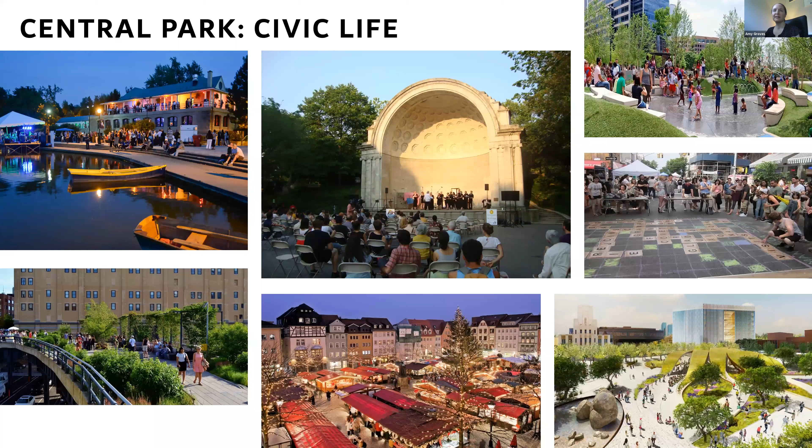The ideas for this site for the future include how to connect to nature, how to create civic spaces that can be the center of town, places for gathering, relaxation and recreation, and of course more formal recreation facilities. Lots of different sports are envisioned for this area, everything from golf, track, pickleball, cricket, baseball, softball. So lots of activities to fit on the site.

And so what we started from this week, you saw these images. These were the town's initial plans, starting with Westwood. In this image, north is to the right-hand side. You'll see Sheridan Drive on your left and Maple Road on your right.

So the ideas included creating a great Central Park space with lots of passive recreation areas, trails throughout the site, and the idea for Ellicott Creek being expanded to create a large lake feature, and ideas for enhancing arts and culture on the site, including perhaps a new theater building next to the existing clubhouse that could be repurposed for arts purposes.

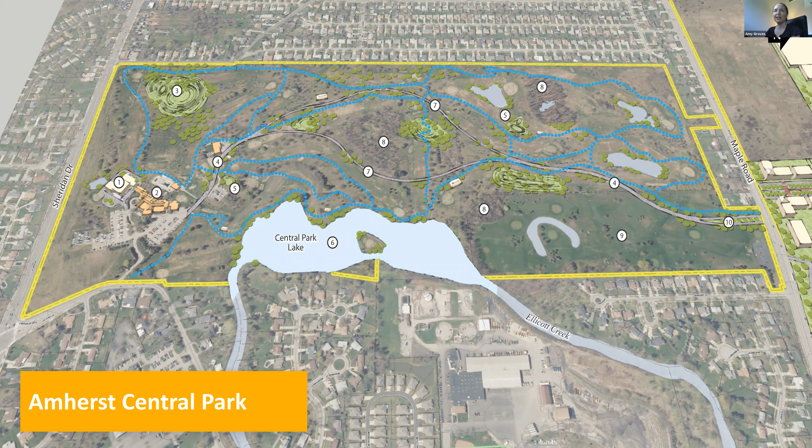So again, these drawings came from a lot of time and collaboration between many of you all on the call, and reflect a lot of that input.

And so then this was the initial vision for the Audubon site. Again, lots of input and ideas reflected, everything from the 9-hole golf course, and in the center of the screen, you see lots of different recreation areas: baseball, softball, cricket, soccer, pickleball.

And then the left-hand side was where it was proposed to have new development that could complement the park site: senior living, mixed uses, the new field house, and potentially also new development around the North Town Center and the UBMD medical facility. So lots of different uses coming together on the site to create a central park and new hub for the town.

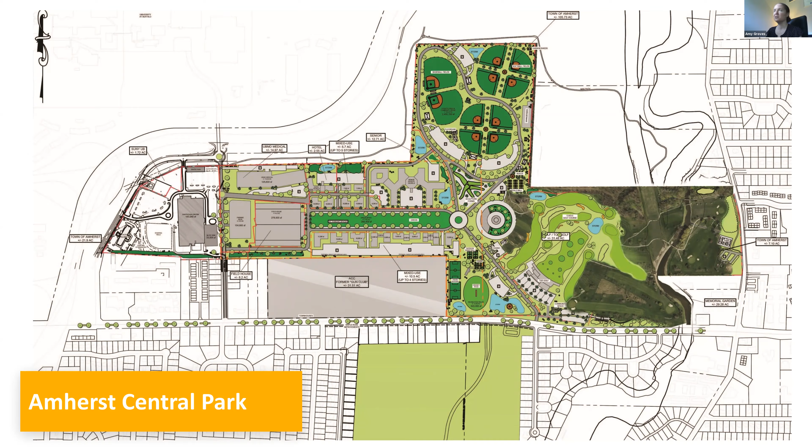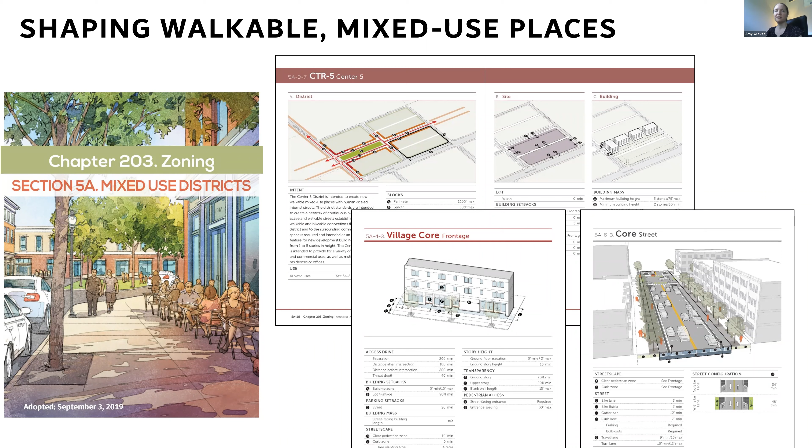Dover Kohl has been working with the town since earlier this year, helping to explore the potential under the new mixed-use zoning code that's been adopted. This code is adopted and could be used in areas that want to redevelop in a walkable, mixed-use way. It has all the rules included, all the ingredients for what makes a great place, like how to design a walkable street and how to design buildings that relate to the sidewalk.

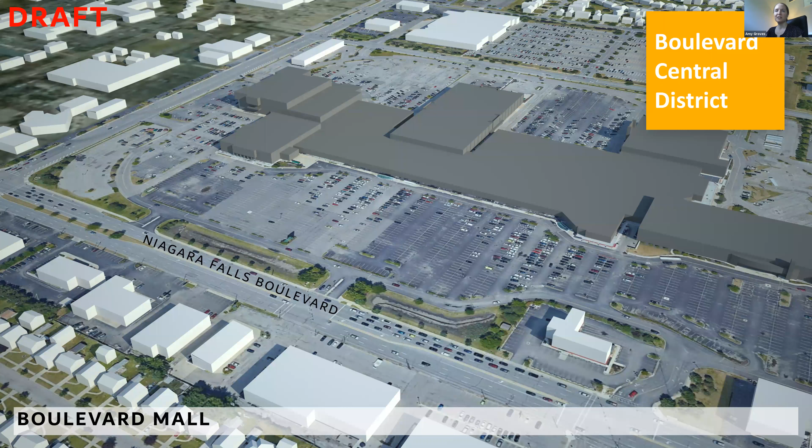So these rules are already in your code, and we have been helping by looking at the Boulevard Central District and seeing how those rules could apply to properties there.

This is an image of Boulevard Mall, what's existing today. We explored how over time new pieces, new streets could be added, and areas around the surrounding parking lots could be filled in with new buildings. Slowly over time, new public spaces are added, and the character of the area could change, following those rules for walkable mixed-use development.

The Boulevard Central District — here you see Niagara Falls Boulevard on the left of your screen, and the Central Park site on the right. Over time in the Boulevard Central District, some of those properties may decide to redevelop and have walkable, street-oriented areas like we just saw on Boulevard Mall. Perhaps some of the other sites as well might choose to redevelop, all working together with the enhanced transit coming through the area and creating these new centers.

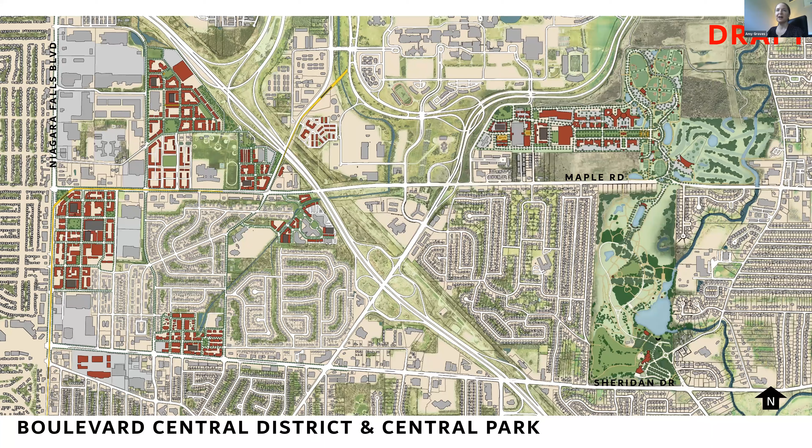What we're going to talk about today is how the Central Park site can fit into this big picture and have another additional center to serve the town of Amherst.

This week we met with many of you. Here's a list of some of the groups we had, with different interests: recreation, arts and culture, golf, waterfront, and the different developers who are interested in the area, talking about the plans done so far and how we could enhance them.

So here are some of the ideas. We have pages and pages of notes, and we've been going through them and using them to update our drawings. But just to give you all a sense of some of the comments we've been hearing.

On the park, we've heard a lot about four-season facilities — not wanting a park designed only for the summer, but able to have things used in the winter as well, like an ice rink that could also be a track in the summer, or a sledding hill that could be used for training. We've been getting more emails throughout the day with additional things, so that list will grow.

The ball fields — we heard lots of comments wanting to make sure they're set up for tournament play and the needs of the youth in the town, so they work best. Also wanting adequate facilities: restrooms, concessions, enough parking, and appropriate access to that part of the site.

So we've got some ideas. We're going to show you how we've been refining the plan.

For cricket, we heard the area initially reserved could get a little bigger to include some warm-up space to serve those players. For pickleball, wanting at least 16 to 18 courts — the last plan had 12, so we've been growing that area.

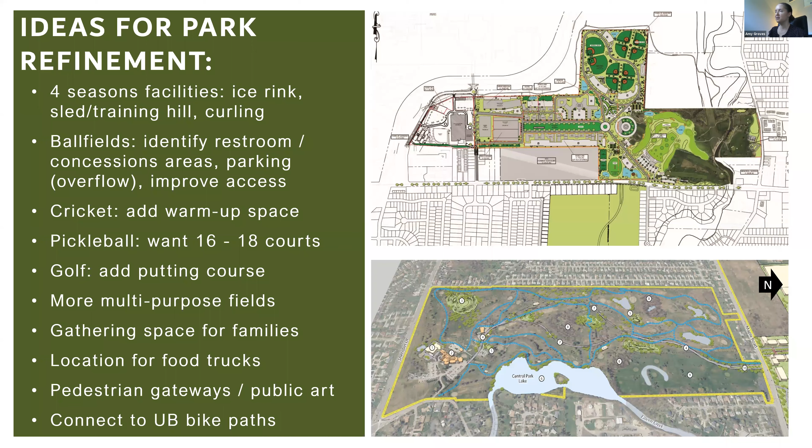So again, just a flavoring — I know there's lots and lots of things, but so that you can hear. There are some questions we're working on resolving, for example, how much parking is needed on the site.

And should there be one garage structure or a couple of garage structures? So we've got some ideas to share with you on that. Access, how do you circulate through the site? How many times or where can we connect to the surroundings? For example, to Maple Road or Millersport Highway, are there other opportunities for connections so that all the cars don't have to come in and out the same way?

How do we upgrade the experience on Maple Road and safety? So we heard that it's an issue crossing between the parks perhaps, can we make that better and safer for folks to use the trail system?

The field house, not sure yet how large of a footprint's needed. So we've got a footprint shown on the plan and idea for where it could expand over time. The ball fields, we've been asked about if they will have lighting. The answer, yes, they will have lighting, and we're working on the details of exactly which ones will be lit, but that is in the plan.

Golf, knowing where will there be the municipal 18-hole golf course in the future. And then remediation on the Westwood site, questions about what is needed there.

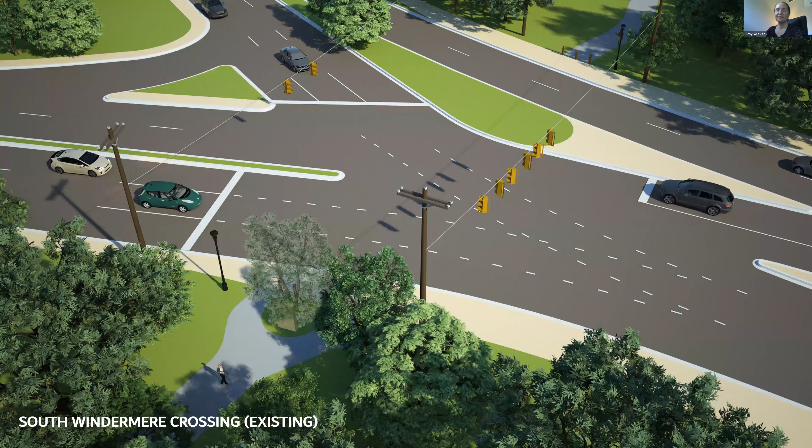So with that, I'm going to turn it over to Victor to talk through some additional inspirational images we've been looking through. Maybe if you just back it up one so I can, from my introduction here, there's a couple things I think have become clear to me over the last week as we worked on this.

First, just how vast the territory we're planning together here is. As you look at those long lists of ingredients that people would like to include in this really banquet of public space and development and economic prosperity, is there room for all of that? And I think we can now say with pretty high confidence, yes, there is. And without compromising the ability to have significant areas for open space, for long views, for environmental restoration. It's really an opportunity for both, and as we look at these long lists, not either or. There's a lot of room, and I'll try to make that point momentarily.

The second one is that the diagram is really strong. What Molly and Jeff and others, the supervisor and your whole team put together before we came on the scene is really good. And if you hang out with architects and landscape architects, they throw around foreign words. One of them is PARTI, P-A-R-T-I. PARTI means the essential diagram, basically, the decided approach that you're bringing to the thing in a design. An architect does a PARTI for a building, a landscape architect does a PARTI for a garden. And in city planning and civic art, we also have that need for a fundamental organizing principle.

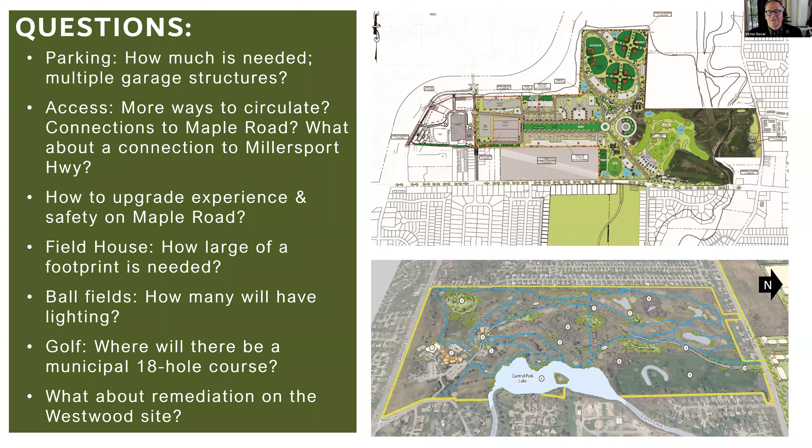We were asked many times about how do we make the whole thing feel like an environment infused with art. So I hope that what we show you in the next few minutes will reassure you about all three of those. Can you go to the next one?

There were all these things that were already listed, and then we were asked to see about where there were potentials for adding more. And one of the things we heard about a lot from folks involved in cultural activity and just people who care about the community was this idea that it's a place for art in all its respects, that the whole environment feels like a work of art, and there are locations for experiencing public art and the arts, including performance, theater, and music.

And I just wanted to show this a little example from a park project in Charleston, South Carolina, which I think is an informative precedent. Go to the after shot here. This is just a crosswalk. It's the crosswalk for the East Coast Greenway, a bike path, a multi-user path, and this is in Charleston, South Carolina.

But they took on the functional need to make the crossing more evident and safer, the high visibility, but also to infuse even that with a little bit of a sense of artfulness with just the symbols on the road. And so if you think of it like that, as we zoom way out and show you big picture things, remember that at some point, someone will, as a designer, zoom way in and do small details. Can you go to the next one?

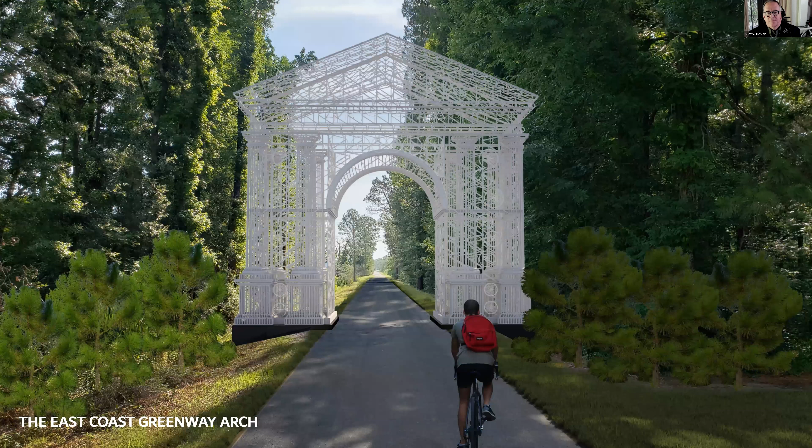Another thing about a big green park like this is that the natural backdrop forms a setting, a context for works of art, including monumental art or public sculpture, or earthwork art. This is an example from that same greenway where there's a place you can ride through an arch along the trail.

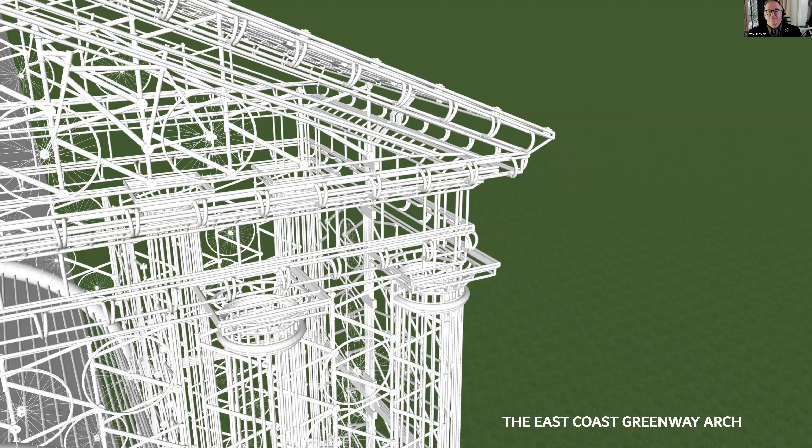It's actually intended to be constructed out of recycled bike parts, which is kind of fun. The point is there could be art everywhere for the people who asked about that, and I think that's possible because the main diagram supports adding new flourishes and activities as you think of them, as the need arises, and as enthusiasm continues—because I hope you're still not finished with this park 50 or 100 years from now, just as people around Prospect Park or Delaware Park consider them works in progress forever.

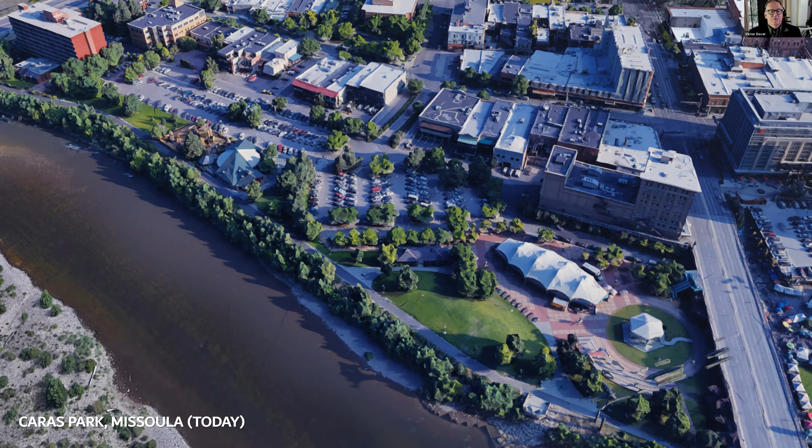This is an example from Missoula, Montana, where we recently redesigned the Riverfront Park. It's called Caras Park—here's the before picture, here's the after. It has a lot to do with peeling back extra asphalt that really is in the wrong place.

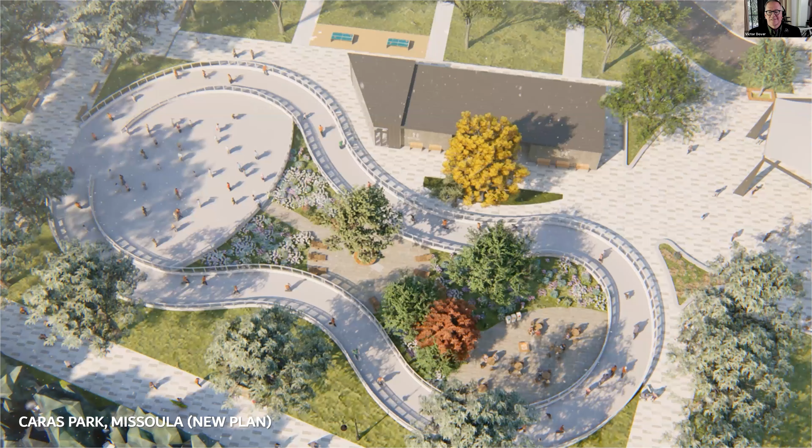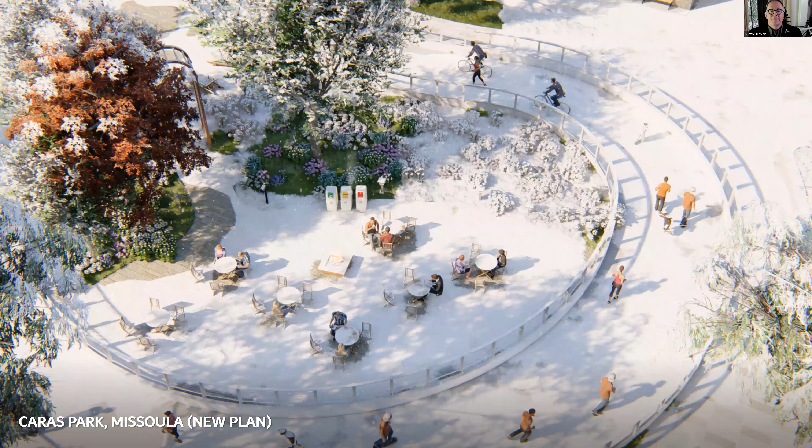There was one feature here that came up that people asked about, so to finish off this idea of precedent: the skating facility. Instead of being a rink like you'd play hockey in or do the ice capades on, it's a ribbon. This will zoom in a little—it's meant to be a way of making, in their cold northerly climate, a Four Seasons park.

From my perch here, I think of everything north of Fort Lauderdale as the frozen north, but I thought you might be reassured by seeing winter pictures of Missoula. Here's their ice ribbon—it's set up so people can watch, and they don't necessarily just go around a big oval, but go through space.

What surprised us was when that suggestion came up in Missoula, it was really, really popular. So here this week, we were asked about a skate trail that could go through the trees. That's an excellent idea, and one definitely worth exploring—we have a placeholder in the diagram for it.

But it might also be possible to add, given you've got all that cooling equipment and the glycol system you use in the North Town Center, a nice ribbon like this one in the area near your new hotel and the North Town Center. So we'll look at that in the plan.

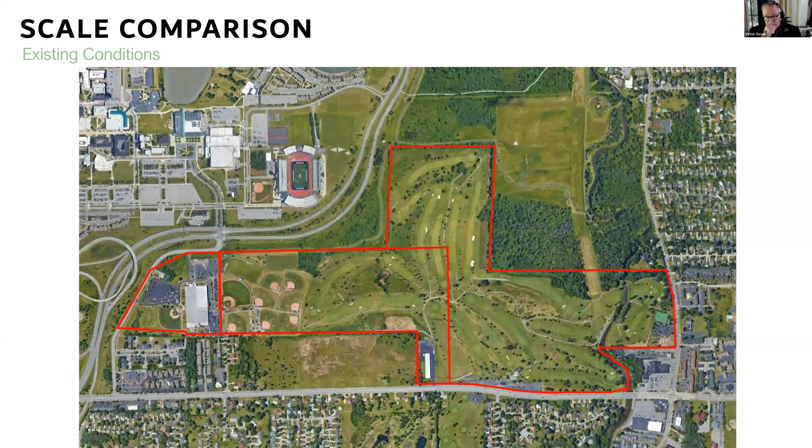Here are the various parcels of the Audubon site, where at the bottom of your screen, running left to right, is Maple, and at the top left is the campus. You can make out the size of the ball fields there. Now, at the same scale, pasted onto the part identified for development, is just a piece of Benjamin Franklin Parkway in Philadelphia.

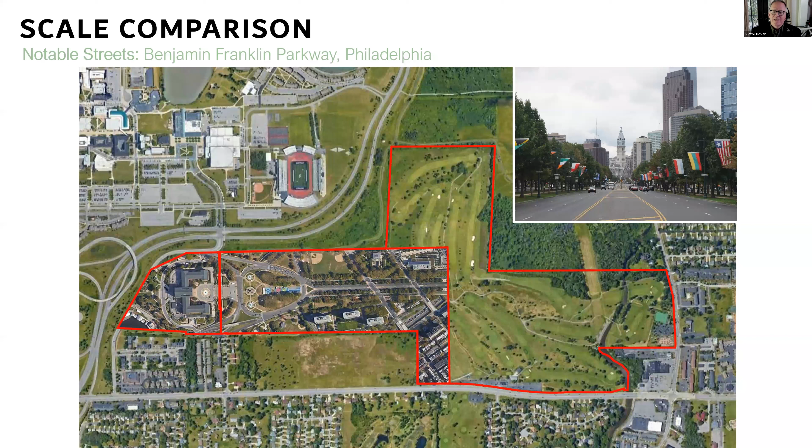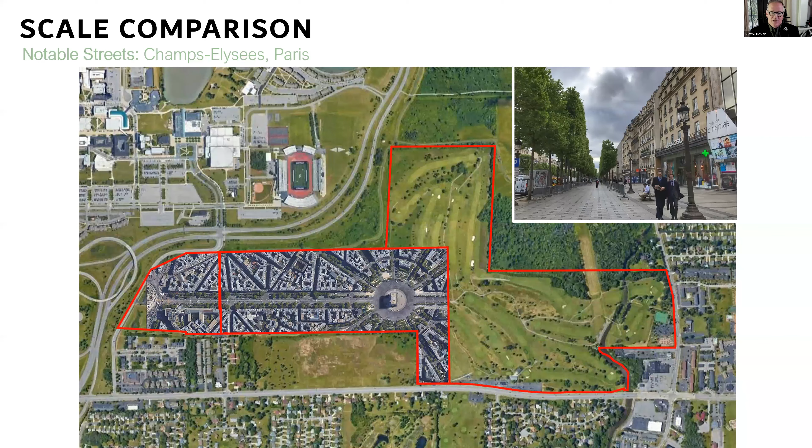You know where Rocky ran up the steps at the end toward the art museum? That's that space. Here's the Champs-Élysées in Paris with the Arc de Triomphe at the end—these are, if you've been there, enormous spaces. We thought this would be fun to look at because of that long east-west axis that appeared in the original diagram.

Here's another long axis, Commonwealth Avenue in Boston, with a green linear park around which the real estate development faces. When they built that park, part of their Olmsted legacy, Commonwealth Avenue set up a great address in Back Bay. It wasn't just making something green or making a wider street, it was setting up an address, so the adjacent real estate had prestige and the benefit of occupants overlooking this space. Moving back and forth from one end to the other, you'd have a unique urban experience. We think that's possible here too.

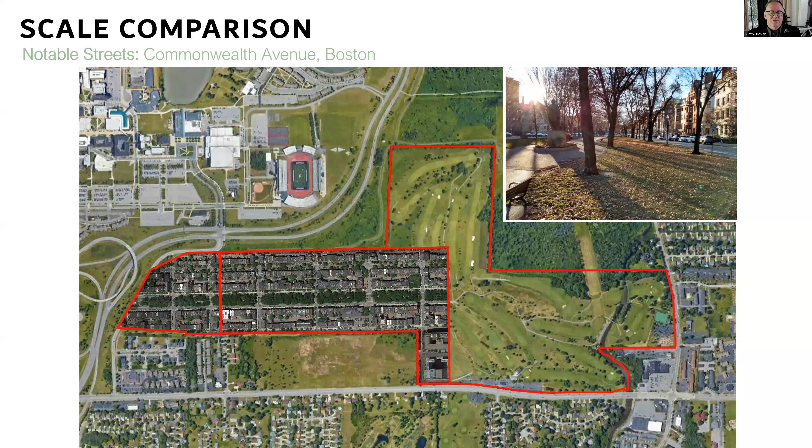Next, this is the Rambla in Barcelona, which is actually vast - if you've been there, it's an enormous space. This is the central one, Les Rambles, which has a very small amount of its width devoted to cars, most of it in the center devoted to pedestrians on a promenade with trees. If you've ever walked from one end to the other, you know how far this is compared to the Audubon site.

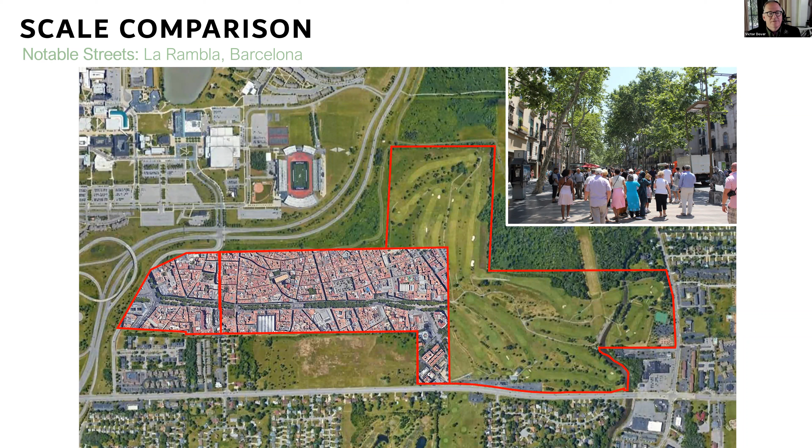Just put a few of these here for fun. Closer to home, here's Main Street in Saratoga Springs, and you know how it has that famous, very slight bend in the street, which tips the storefronts into your field of vision as you move along it.

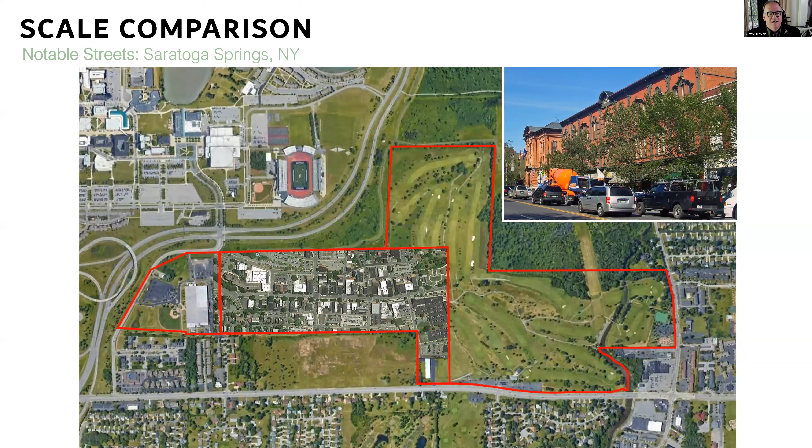There's room here for a lot of town - room to do a number of addresses for a great many new buildings and blocks and streets in a whole neighborhood sort of way.

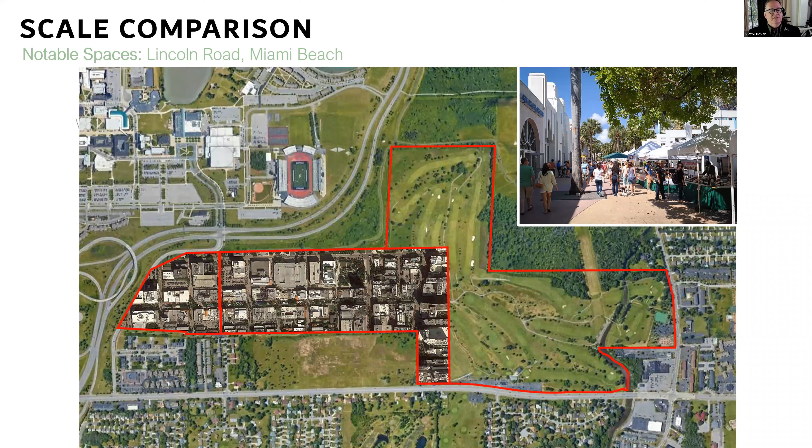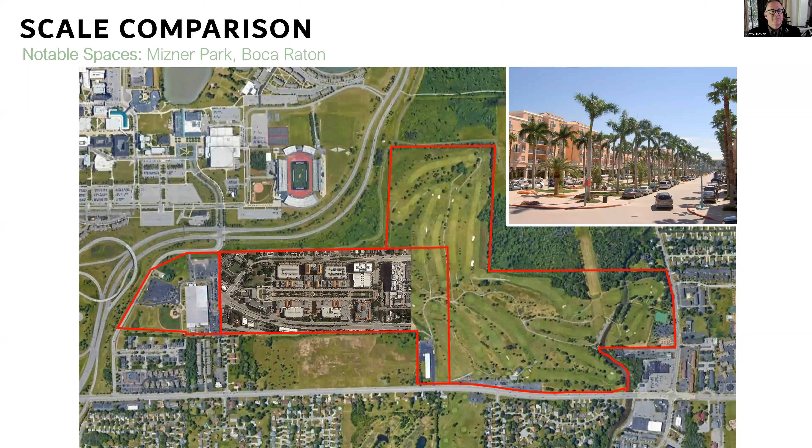This is a pedestrian-only street closer to home for the folks who visit us down in the tropics - that's Lincoln Road. Here's Mizner Park, more recently built, which has this central grand promenade that we heard was an initial inspiration for the green in that diagram for Audubon.

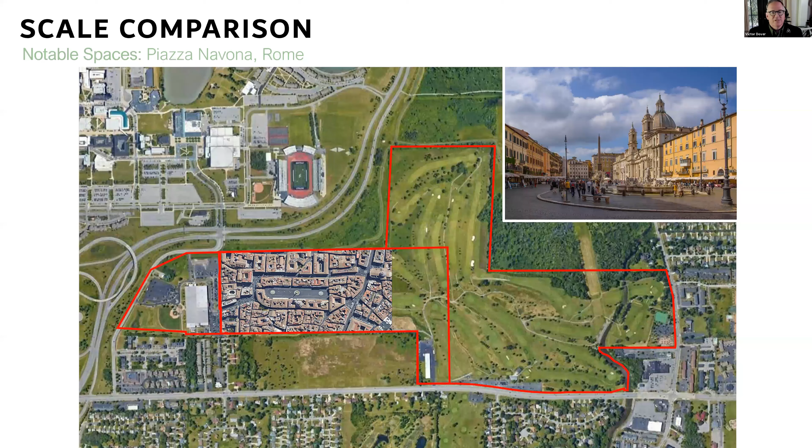And just because we can't help ourselves, one from Rome, the Piazza Navona, perhaps one of the greatest public spaces in the world. And it only stretches about a third of the way between the North Town Center and the parts on the east that are meant to remain in pure park form.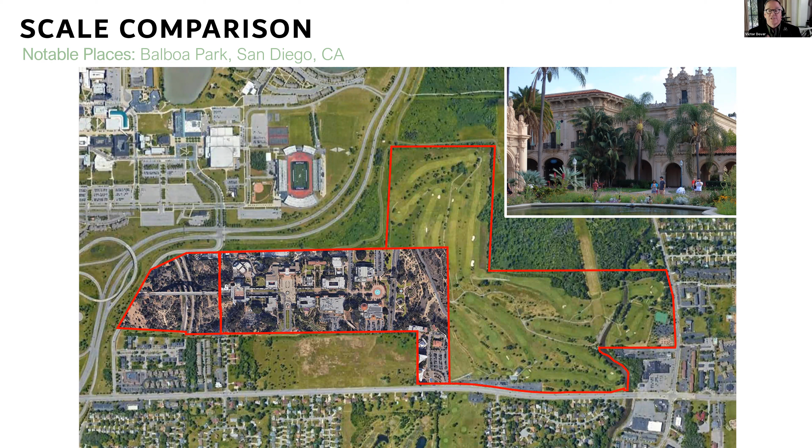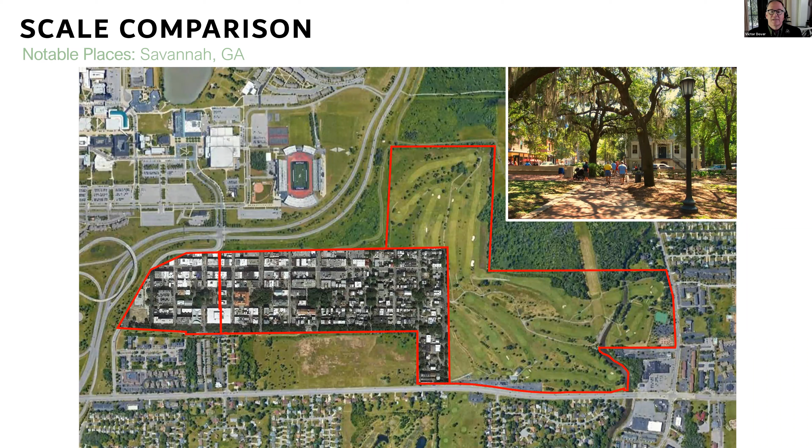So the scale comparison should tell you two things. One, there's a lot of room here - here's Savannah's squares as a final example. And two, you don't have to be afraid to use it. You will, even though you add buildings and the parking needed for those and add streets, have blocks, hopefully of a small enough size to make the environment walkable, and still have room for substantial leafy green spaces. Even in the built up part on Audubon, it can remain tranquil, and all around it, even more so.

Next. Now, everything we're about to show you is a draft. For plausible deniability, let me say we're about to show a number of images that your supervisor has never seen - sorry, Brian, we just produced them in the last 25 minutes. Kim has never seen, Dan has never seen, your other elected officials haven't yet seen. It's just a draft - everybody, please repeat after me, draft. That means everything we're about to show you can change, probably will change, get refined as we go forward. But we thought it was a good point now, after several days of work, to put our pencils down and show you what we have so far.

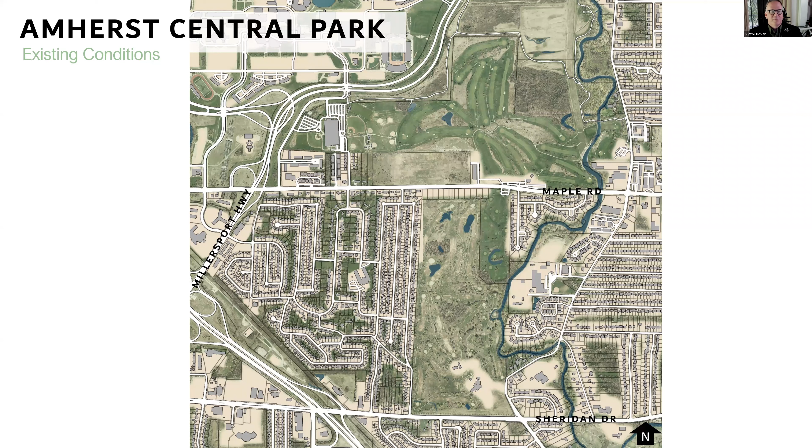Okay, so here's the aerial photograph and little footprints for the existing buildings on the existing conditions. To orient you here, Sheridan's on the bottom of the picture, Maple's running across the middle, north is up, and here's the after condition.

After substantial development closest to campus, retaining that long central green, we made some tweaks to that idea. Then active recreation, including baseball, pickleball, tennis, cricket, and golf in the northern part on Audubon. And then going like a T shape down the center of your image, the Westwood site refashioned as a nature park. I'll also point out that rectangle in the center, the gun club parcel, for which the future is not entirely certain.

We know, but when we look at how it all is built up around it and how incredibly shaping of the potential for that parcel the park is, we've recommended it be included for the purposes of planning, that we've been thinking about and thinking ahead about what eventually the gun club parcel might also be. So you'll see that as well.

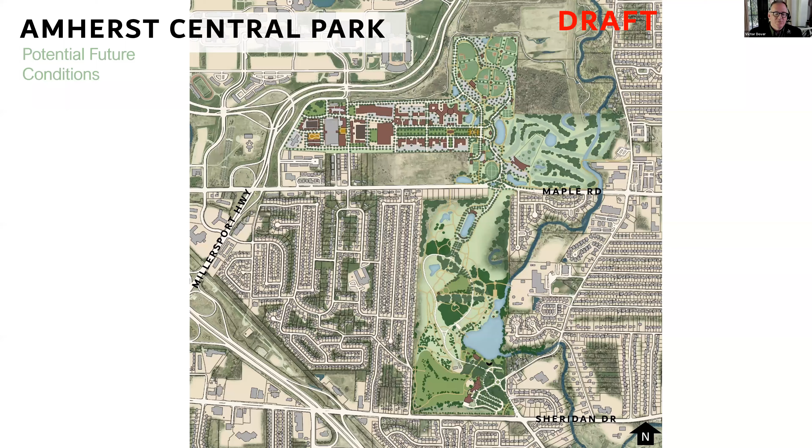Now, we've thought that it might be useful to x-ray this a little bit and simplify it, just like your doctor x-rays you to make it easier to see what's inside. The first of these x-ray diagrams shows the existing and proposed or imagined street network.

In the upper left-hand side, the streets are in a more regular format, like a traditional town or village, with interconnected blocks of streets. On the eastern half, running between both parks as we move into the nature park and recreational areas, the street network relaxes into an organic or picturesque geometry, more in the Olmsted tradition.

So juxtaposing those two kinds of geometries is one of the things we spent some time tweaking over the last several days. Next.

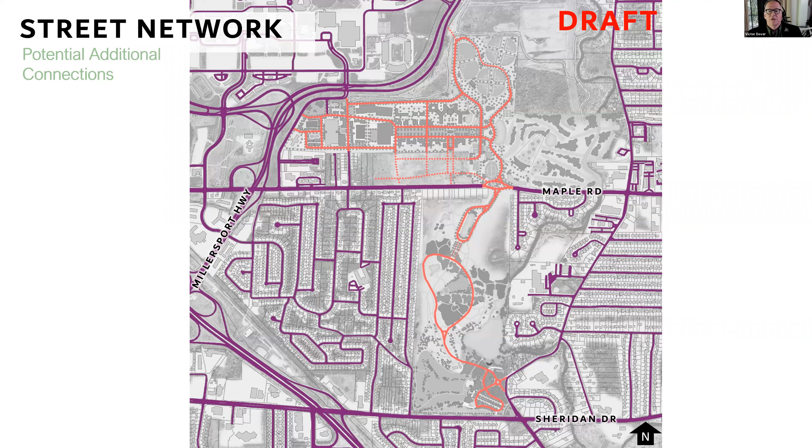This diagram also shows, in a dotted line, some potential additional connections if and when the gun club parcel comes in and is developed, so that everything becomes more whole as growth and change occurs. It makes things better rather than worse.

Okay, Amy, you want to tee this one up?

Sure. So now we're looking at the big picture back over Sheridan Drive, looking towards the north. This is existing conditions, and then we've laid that diagram into the site so you can imagine in perspective how that would look, starting to pop up some of those building forms.

So this is in progress work. We haven't yet modeled the park area, so that's to come. But you can see this starter diagram begins to help visualize the view from the south, looking out over the park towards the university.

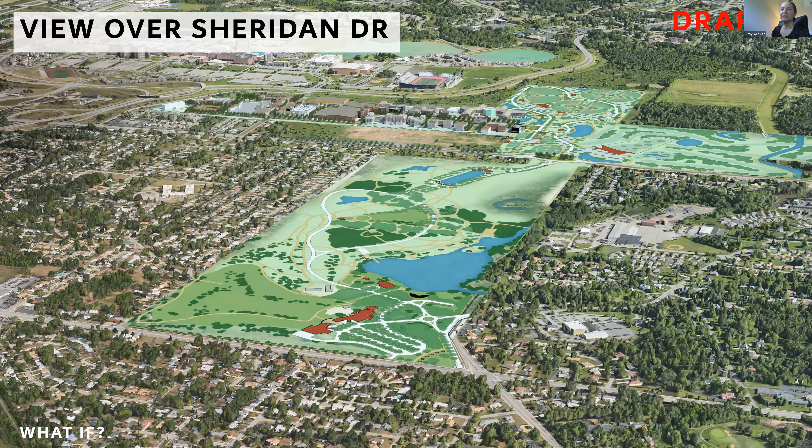And so we're going to start with the southern side and Westwood. Victor, if you want, I can cover these and you can just interrupt me. And Joe, please interrupt me also. When you do the close-up, I'll jump in.

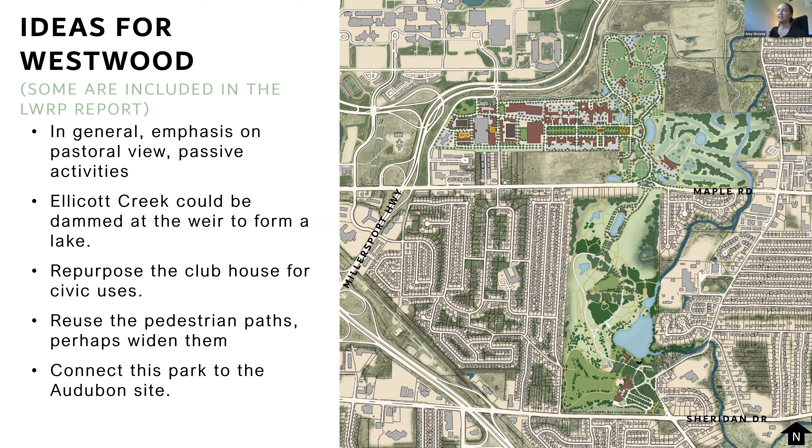Okay, great. So again, some of the ideas we've been looking at come from the work already done in the LWRP report, but in general, emphasizing passive activities on this site. The idea includes damming the creek and creating a lake in this area, repurposing the clubhouse for civic uses, reusing the existing golf paths as multi-use pedestrian paths. Perhaps they could be widened for that purpose, making a really great connection to the Audubon site.

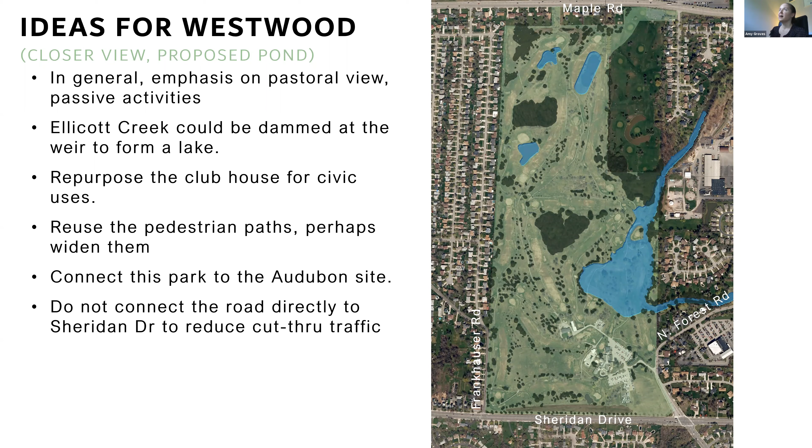So we're going to go here layer by layer. This just shows the pond view, and again, for the connectivity, I'm going to go to the next slide.

The streets can connect through, but perhaps at certain times, certain portions could be closed off, so it doesn't create a flowing connection north to south, but rather you could decide when you open and close those. Also, there was a decision to connect to Forest instead of Sheridan Drive.

And these paths meander through the site. So again, it's not an easy north-south shot, but the idea is that the folks coming through here are using the park and enjoying the facilities.

Joe, is there anything else you want to add about that? There's a whole suite of tools we can use to discourage anybody from even thinking about using this as a convenient daily cut-through. Some of those tools are already on display in the geometry, and there are other things we can do in the design of the streets themselves. So I think this will be inviting to people who are coming to be here, and not very inviting at all to those who might think it's another way to get around.

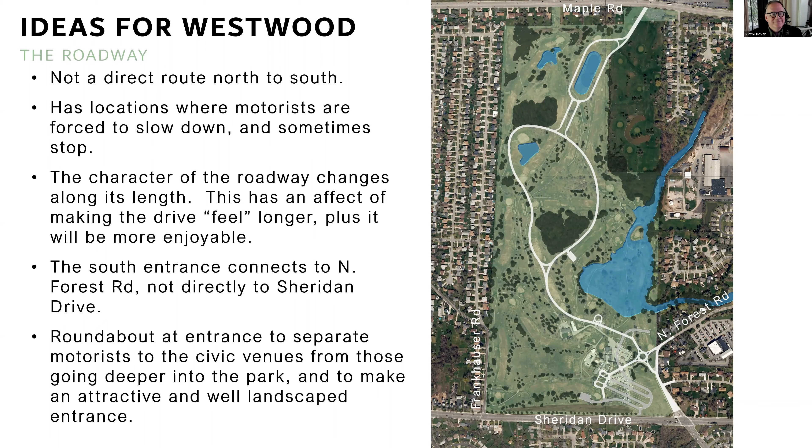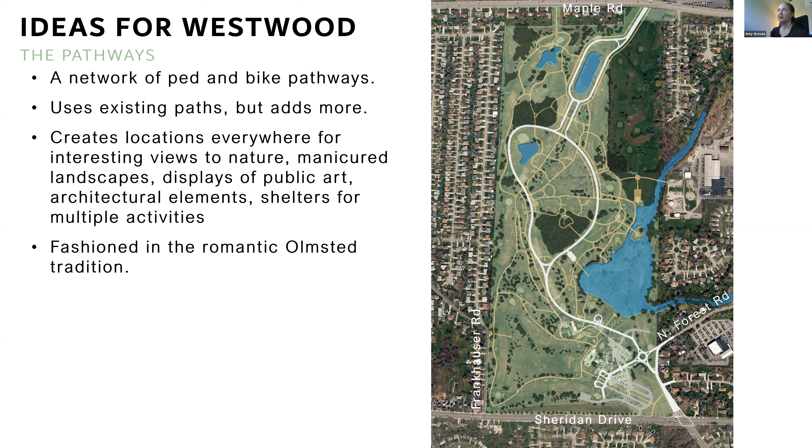And then adding onto that diagram the pathways. Again, this is looking at great parks and the Olmsted tradition found in the region, and looking at how to create interesting experiences throughout the park with a real network of pedestrian ways, opportunities for public art, and interacting with the different shelters you can see on this next diagram.

So there could be, in addition to using the clubhouse, adding a theater facility on the south, and moving through the park many different opportunities. There could be a great building overlooking the lake, more small structures throughout the park, pavilions for events, and you can imagine having a great wedding photograph in many of these places.

And the big idea, lots more. Just one more thing about the pathways: this is shown with just two colors, the brighter white for streets that can have traffic, and the yellowish or sand color for those meant to be pedestrian paths.

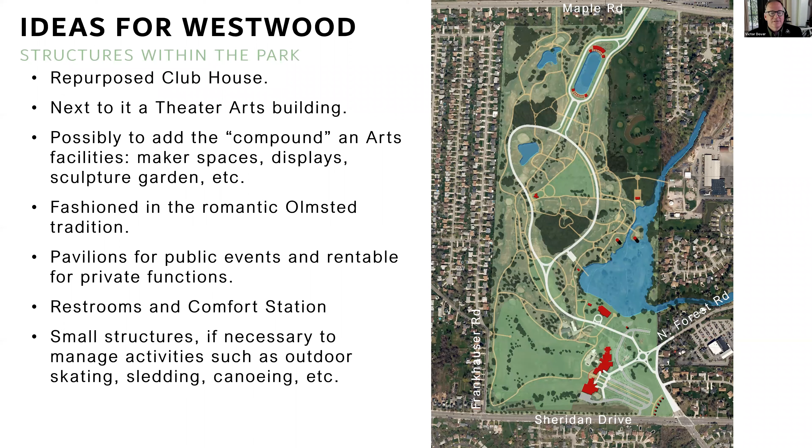But within both of those, there's a whole range of different street types and trail types. Some trails might best be mulch, very natural, just for walks through forest or garden, and others paved for universal access, and still others paved a little wider so they work for biking as well as walking or running. So don't look at this diagram as all one thing—there's a whole range of decisions to be made about each segment or loop in a trail system like this.

Looking at Olmsted's legacy, the designs are very informal and curvy and naturalistic, but every now and then you come upon something a little formal, and in that formality they've set up great places for public art or some type of architectural folly that children probably enjoy more than adults, because it builds on fantasy and imagination. I think there are thousands of little mini projects in here that the community can have fun figuring out and building in the future.

I'm already jealous of whoever gets to actually design this park.

And just this last slide, emphasizing trees, the big idea. So planting more trees in this area, and that canopy, can really help define the character of this area.

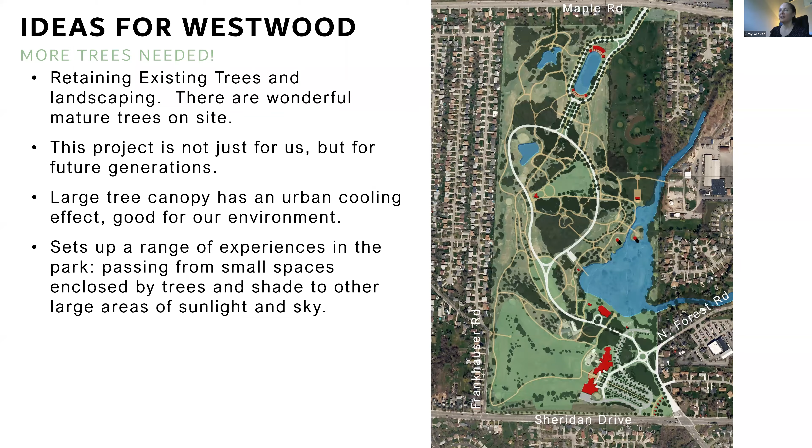On that subject of more trees, we haven't even added in our diagram yet all the trees we know need to be added, or captured every existing one. So be prepared to see a greener, more dark green version next time, where we deliberately keep the long views set up by the old golf course, which make great gestures across the land and terrific places for wedding photographs as a backdrop, but also closing those views a bit or framing them with new forested areas, and doing street tree planting, which we haven't shown much of in this diagram.

There's a pair of buildings in the foreground worth talking about: the existing clubhouse, and an imagined facility for the arts. Those could be together—they could share, as the old clubhouse is repurposed for civic use, and the performing arts facility, should that mature here, share the parking, but also the terraces off the back toward those long views, making amazing places to step out during an intermission, or have a reception. So we're trying to keep that thing that's wonderful already about Westwood on each corner of the plan.

There's one example of that. If you look at the plan, facing that long view next to the existing clubhouse, between the clubhouse and the theater, and look to your right, the pathway leads in front of the swimming pool toward the lake. That's one of those classic situations we try to set up, where you go from a big wide open green space, travel through a narrow forested path made narrow by the height and canopy of the trees, and then it opens back up again with an overlook of the lake. So once again, the sun comes out, it's nice and sunny—it's a connection between green and blue.

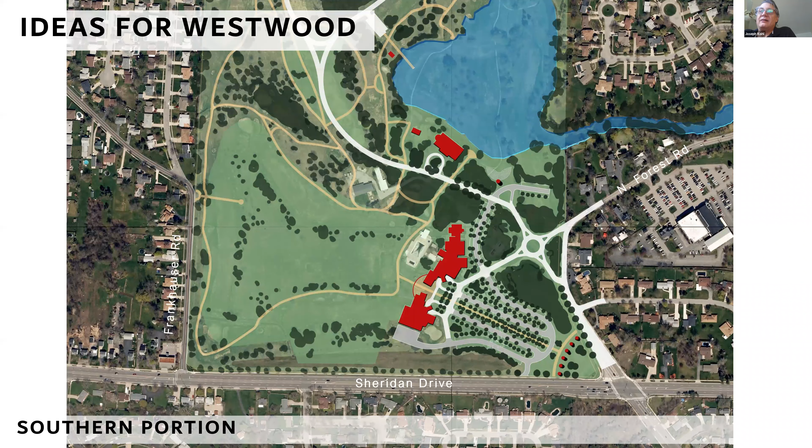Go on to the next one, Amy. So partly this is about getting ball fields lit the right way with the right solar orientation, counting up the parking spaces to make sure that works. And part of it is about composition—Joe's comparison to landscape painting and composition is pretty apt, because there are basically three rules.

One is the one you just described: you go narrow before you go wide, and you maximize those contrasts so that when people go from one experience to the other, it gives you that feeling of, oh, I've arrived somewhere, or this is different.

The second rule is you design not just the background, but the foreground, the middle, and the background. Just as Constable did his paintings, or Humphry Repton did his landscape architecture, and then Olmsted copied that, they deliberately push things into your field of vision on these long views from the side, like the tree island in the lake, or the tree that is halfway between where we are close up and the distant trees. This maximizes your experience of the space, makes it all seem a lot bigger.

And the third rule is line things up. One of the things you line up with is the topography. Look at this picture toward the back—maybe Amy, you can put your cursor over it—you can actually see where the natural end of the Ellicott Creek floodplain area is, and where there's a bluff.

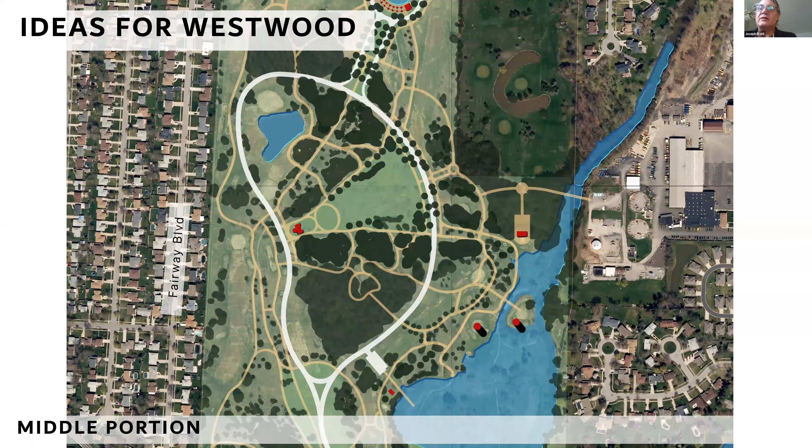The road also runs along the edge of the lake, and I think you'd want to keep some views open to the water or the open space. So maybe the landscaping on that edge is a little thinner, or at least the understory is cleared out a bit. But in the internal part, you could start to build up the landscaping and trees, basically restoring forest habitat. I don't know how well the greater community is doing with preserving forest, but this might be a place where that could be done, so you get the forest experience.

There are a few of those around the plan. We thought maybe a good one there with the lake, so you can experience and enjoy it if you're just driving by, or actually go play with the boats or dangle your ankles in it. It would be used different ways at different times of the year.

Okay, the next one. Just to point out, we've got to move along, so I'm going to push you here. What, you wanted to say something else? We changed the slide on me. There were some things people wanted to point out. Okay, back it up, Amy. I'm sorry. Okay, you got the move along idea, right?

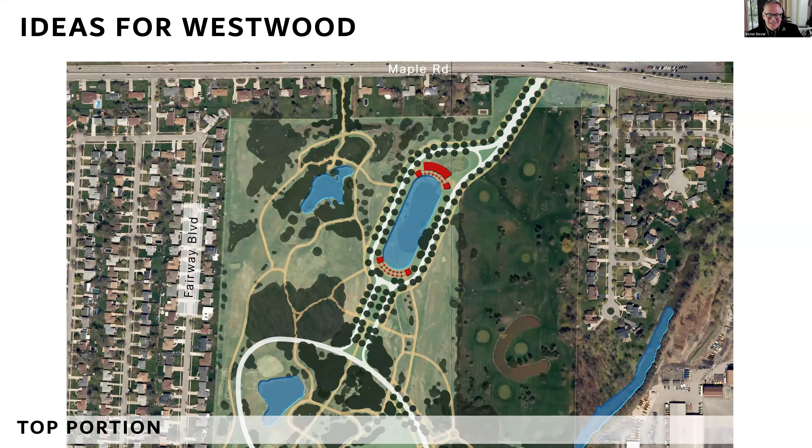Now, we've got the golf people and the baseball people and the skating people and the field house people all waiting, so we're going to keep going here. Amy, let's move up along Maple just for a second here.

So now we're turning our attention from the southern part to the northern part. In here, there's a lot more active stuff. You can see the Top Golf facility, and the fairways for golf. We've managed to fit a bit more there, and I'll let Amy describe. There's a cricket pitch. Can you put your cursor over it, please? We're just doing orientation here.

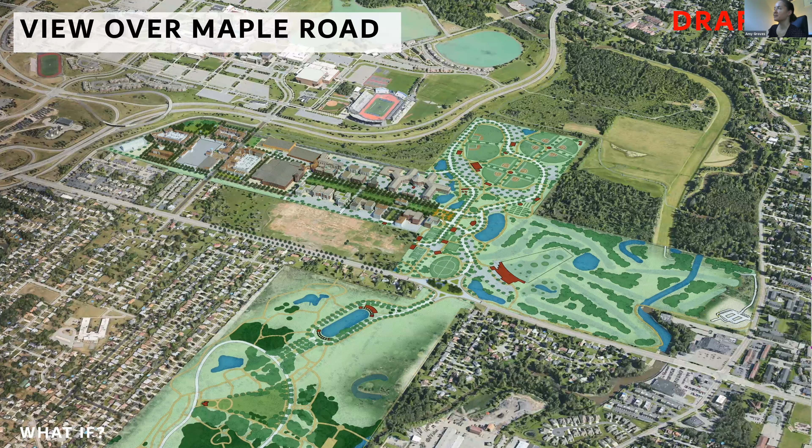So we're going to look at this a few different ways and zoom in. First, looking over top of Maple Road, this is existing conditions, and this is the potential future conditions, showing how those park spaces fit together with the potential development of the top west side of the site.

We're going to go west to east, space by space. Starting on the west, near the existing hockey center, there are ideas for adding an addition to that building to add a fifth ice rink. But we've taken it a step further to see how we could integrate the block and street network from the east side through to the west, creating an easy way to walk and bike from one side to the other. That idea of the ice ribbon is illustrated here on this block.

Again, the idea of incorporating public spaces throughout the project—not just park on one side and development on the other, but integrating the two, having small pocket parks throughout. The idea of connecting through from one side to the other is shown here.

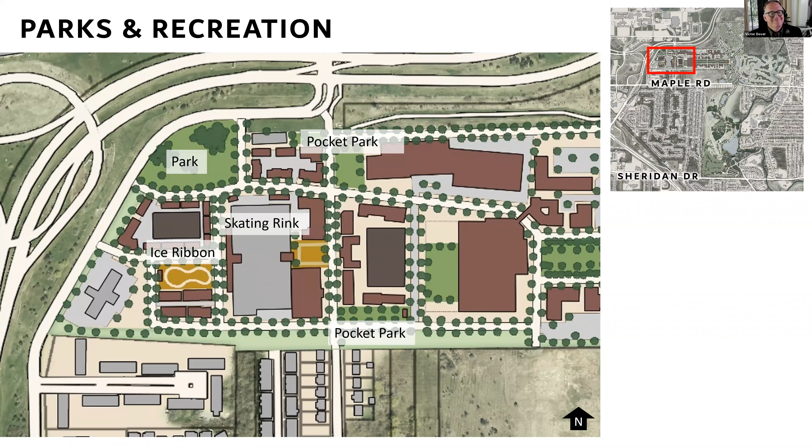Victor, is there anything else you want to mention? The two darker brown rectangles are parking structures. The earlier diagram had one, but it was drawn a little supersized. We've drawn an illustration here of how you could have just as many or more parking spaces, but not put them all in just one place, allowing easier access. We realize it's important that there be a shared parking facility, so that's built into this—North Town Center can get parking relief where it needs it, and there can be parking for the medical center, the new field house, and other uses coming in around here. So it's just sliding over a little bit.

So here's that central green space. You can see the idea of inserting a pavilion into the green space to create a sequence of spaces and rooms that are comfortable in size. This could be further subdivided as you get into the design of that green space to create unique spaces you'd experience. This starts to do that by having this pavilion here, a plaza area to the east, and finally an amphitheater with long views out towards the golf course to the east.

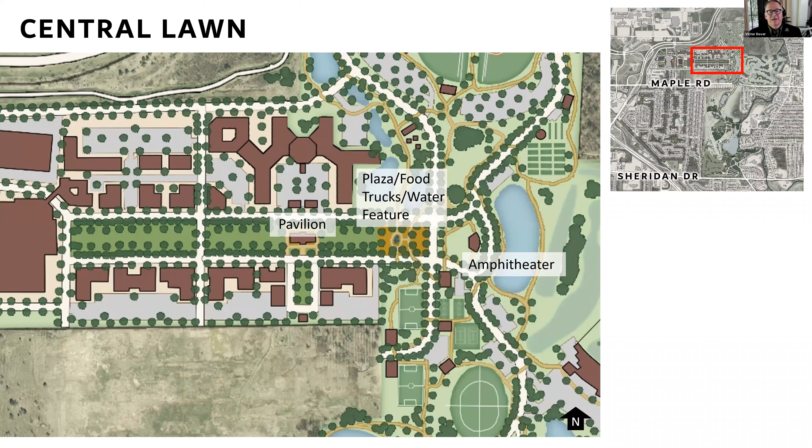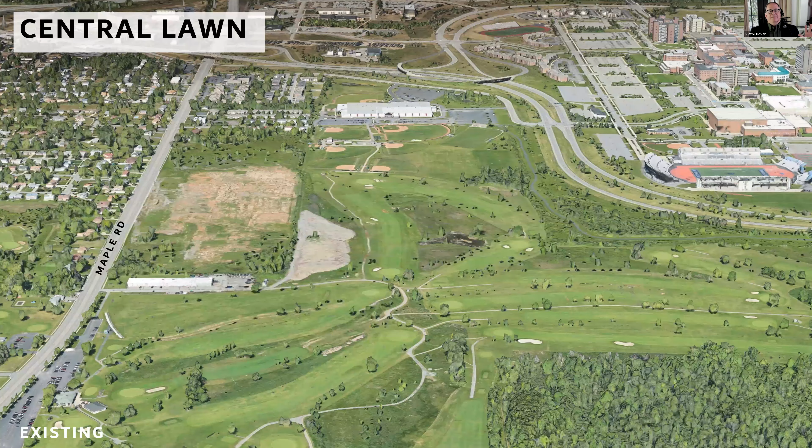Go ahead. I'm going to ask everybody to buckle in tight, fasten their seatbelts, and lean back, because we don't want anybody to get whiplash. We're about to take you from first gear to fourth gear, from existing conditions to a long-term hypothetical maximum build-out future. So this begins the before and after. I'm always worried people are going to get whiplash during before and after pictures.

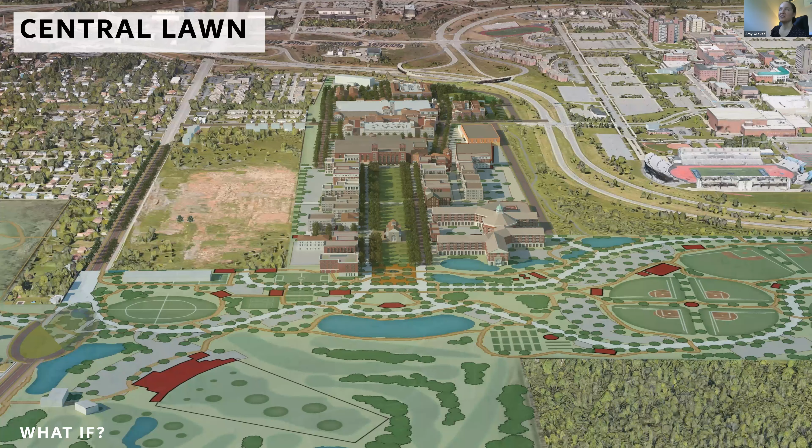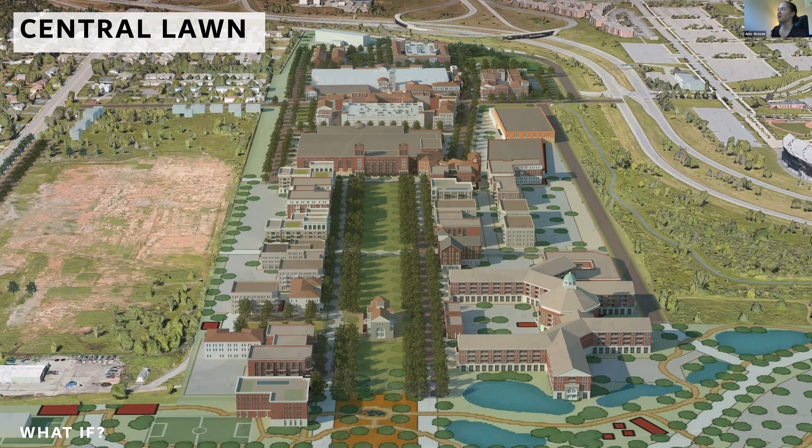So this begins to give you a sense of what this space could feel like. We're going to zoom in a little closer to feel the size of that space, and you can get a sense for what those buildings could feel like leading out to the field house. We had an idea that although parts of the field house are going to need recreation facilities that might lead to blank walls on the outside, the face of the building facing the formal green could have functions like offices, concessions, and more active uses. Those parts of the building could be located on this facade, creating a real interesting building that terminates that green space.

Continuing to move on to the east, we've expanded the area dedicated to cricket. We still have the soccer, basketball, and tennis areas from the previous diagram. One change you see in the middle is an idea for how to cross Maple Road.

Victor, if you want to talk about that. And this is my intervention—so if you love the idea, give Amy all the credit; if you hate the idea, blame it on me. But really, what we feel after looking at the site closely is that Maple is over-designed, and it looks like it's engineered for traffic to move at too high a speed.

And we haven't even drawn in here all the trees and medians that we know exist there. We also know that should the gun club site be developed, there's probably a deep green belt along its southern edge so that Maple will remain greener. But it needs to be more than just going through the motions and having green next to the road.

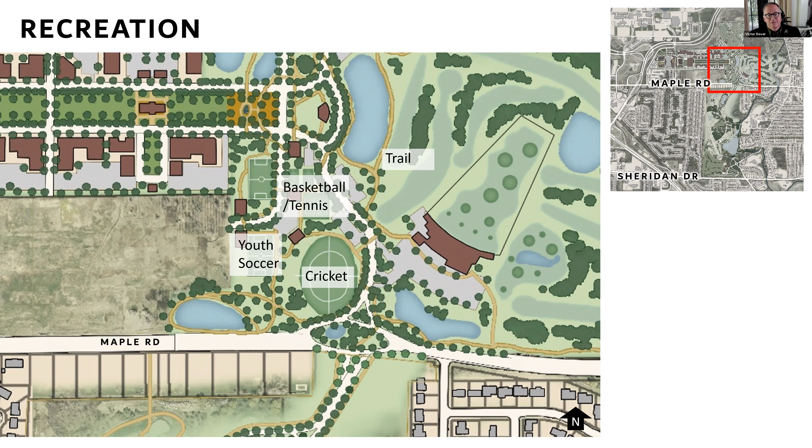And so we've gotten some questions about these, and so I might ask Jeff or Kim, when we get to the Q&A part, to help answer some of those.

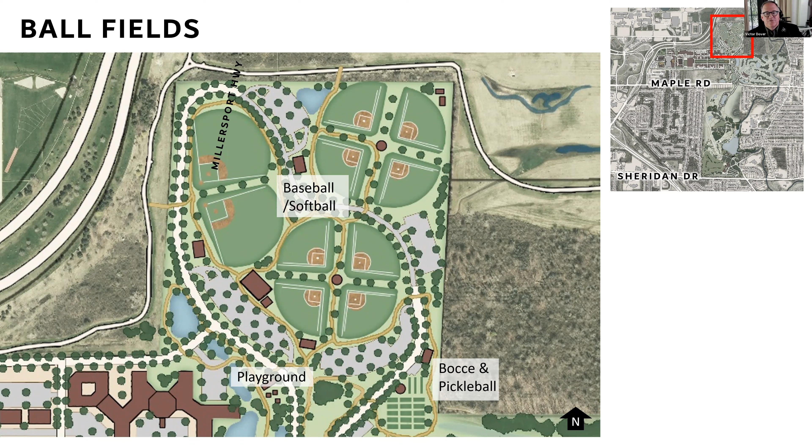As you move from north to south, we'll leave baseball and softball behind, past the Pickleplex for pickleball, bocce, tennis to our left. We talked about cricket already.

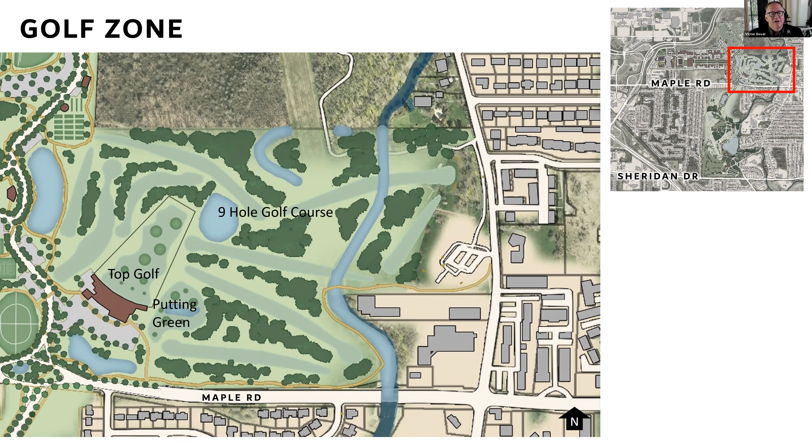And I think that we're getting really close to the end. Just zooming out a little bit more so you can see the Audubon piece as a whole now: baseball and softball in the north, golf in the east, placemaking in the middle, including seniors, mixed use development, housing, medical, field house, parking, and expansions to the things around the North Town Center and the new hotel.

And Amy, do you have one more zoomed out?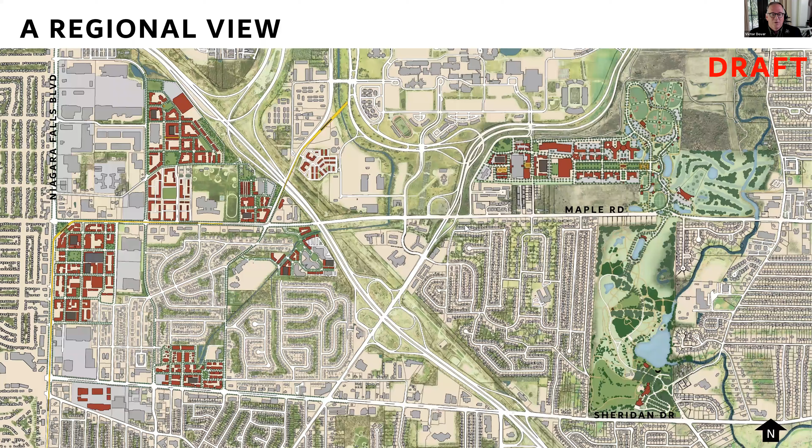Thank you. And I will say, Councilmember, we've created just a first version, and there could probably be many variations on it as we study it more closely, get with the county - after all, it's a county road - and incorporate all the different concerns that will obviously come up. The basic concept we illustrated was an elliptical version of a modern roundabout, but I don't think it's necessary for it to be a pure exact geometry. It's a little larger than a typical modern roundabout.

It would have the same basic principle: the way you enter and exit is safe, like turning in and out of a driveway, but as a slow speed maneuver. We drew an ellipse, or modified ellipse, flattened and lengthened it a bit. There's probably a more formal version, a softer version, a lesser one, so the exact geometry is still to be determined.

The big idea is to use public space to link these two public spaces, and the most important existing public space is the one that's been a public space all along, which is Maple Road.

Yeah, I see it is elliptical. Thanks. Hey, Councilman Lavin is joining us.

Councilman, are you on the phone still? Still here, but I'm joining you from the NCCC COVID Testing Center.

The one comment I did want to make is that I really enjoy the idea of the pocket parks in the development area. It offsets the development, so to speak. Those pocket parks are good for people working in that area and people living in that area. I was really excited that those were incorporated into this site plan.

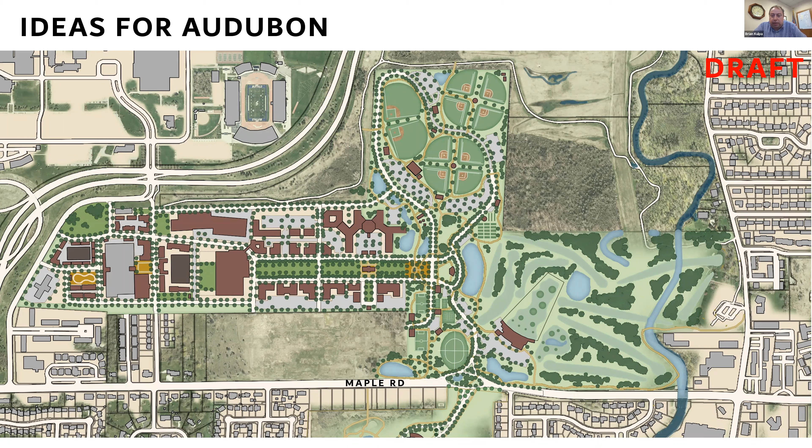I don't know if I'll leave it to you if you have any closing remarks. When I get this many people together who are interested and stay interested for a whole hour on city planning stuff, I couldn't be more excited, because I think we don't get the cities we want by just hoping for them. We get them from drawing lines on a map. They don't come from Santa Claus. We have to do what you're doing this week, which is draw lines on a map and say, how about if we did it this way? And that's what you're doing.

So don't stop. And I'll say this to your company: I didn't know how these things would work in Zoom format, but they benefit us. We got two named principals. Joe, thank you for all of the work, I'm so impressed with what's going on at Westwood. So to have four principals, Amy and James are also principals.

Okay, good. Then I have to say that at the end of the day, your team's done a great job here. We'll look forward to working with you moving forward. And is Dan Howard still on the call? Dan's been in and out of like two meetings all at once. So I'm here, Brian. Dan, your team and the planning department did a great job as well. Thank you for getting us to this point. It's really a credit to your team to get us into the first concepts, and then a great job this week.